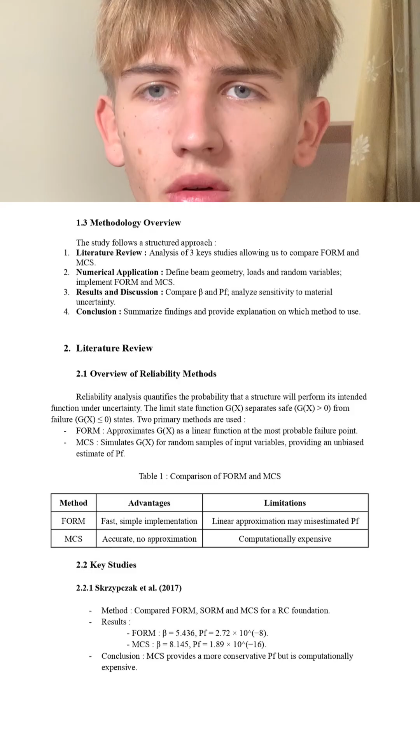So about the literature that I studied for this report, first we had the Skrzypczak document where they compared FORM, SORM, and MCS methods for reinforced concrete foundation. So here are the results obtained. We can see that the MCS provides a more conservative Pf, but is computationally expensive. This means the calculation will take time with this method.

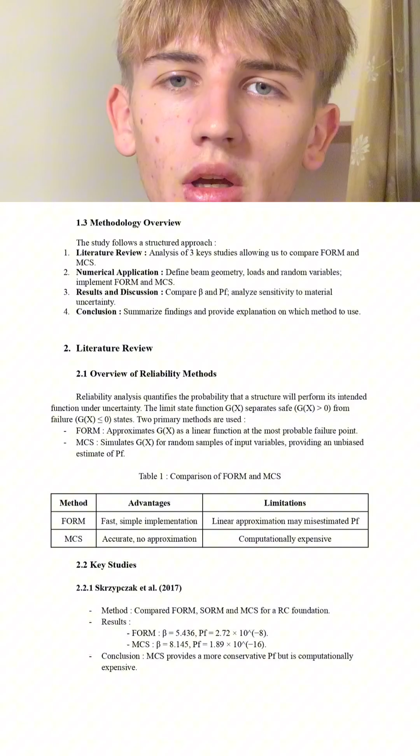About the second document, the Nguyen one, this document applied MCS to a composite steel reinforced concrete beam. So here are the results, and for the conclusion, we can say that the MCS method is essential for capturing uncertainties in composite structures.

And the last document, the El Ghoulbzouri one, compared FORM and ISM. ISM is a developed MCS method, like a new one, for a four-floor reinforced concrete building. So we can see with the results that FORM tends to overestimate the Pf, but is 180 times faster than the ISM method.

So to compare this analysis, we can say that the studies show that the discrepancy between FORM and MCS depends on the nonlinearity of the limit state function G(x). For example, for linear problems like beam bending, the FORM method may underestimate Pf, but for nonlinear problems like foundation stability, the FORM method may overestimate Pf. So this context sets the stage for our study on reinforced concrete beam.

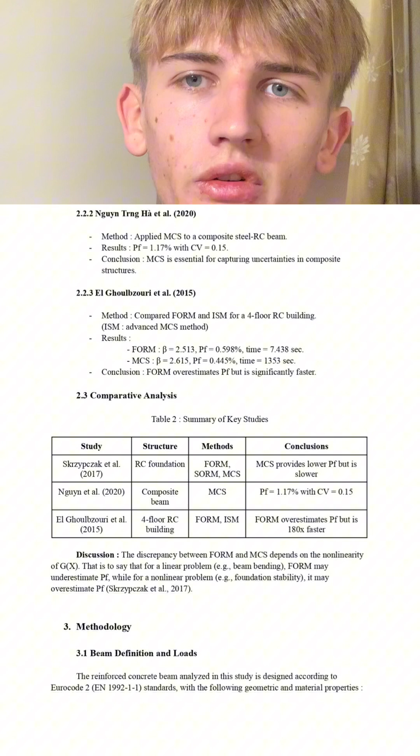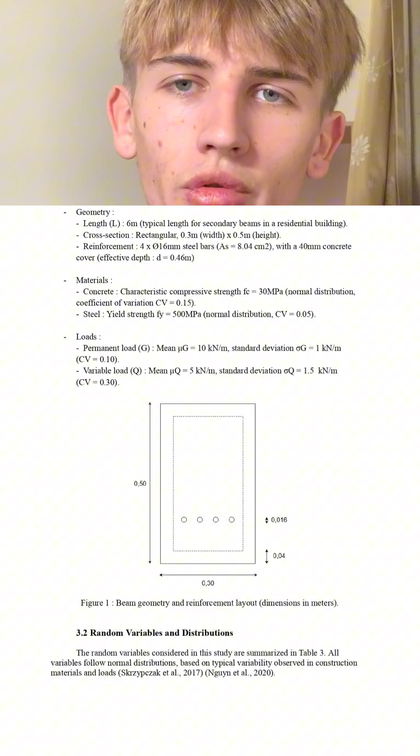So about the methodology now, our study focuses on a reinforced concrete beam designed according to Eurocode 2 with the following properties. So first, the geometry and the materials, as you can see, 6 meters for the length, a cross section 0.3 times 0.5, for the reinforcements, 4 steel bars, and 40 millimeters concrete cover.

About the materials, we took regular concrete and regular steel values. And about the random loads, same. I took the regular values that we can find in Eurocode or something like this.

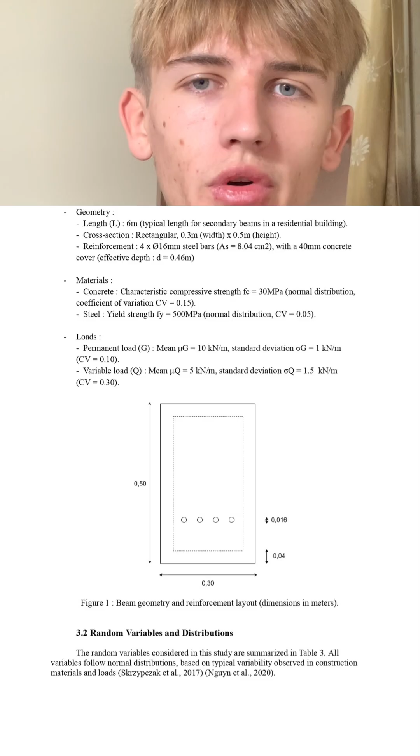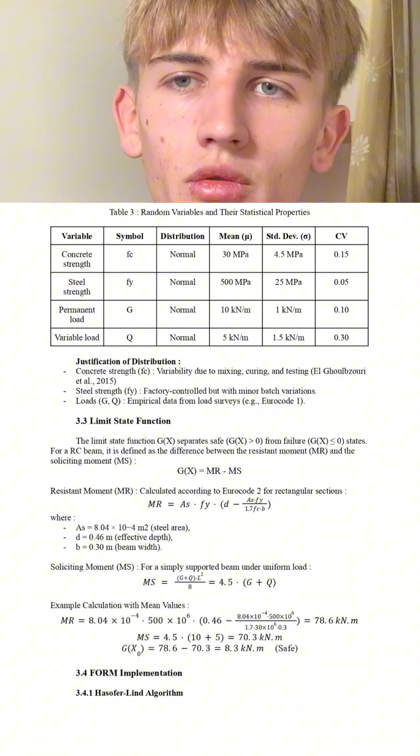So about the limit state function now, we define G(x) equal to Mr minus Ms, where Mr is the resistant moment that we can find in the Eurocode 2, and Ms the soliciting moment. I write the formula just here. So with the values we introduced previously, we obtained for G(x0) 8.3 kilonewton meter. So we can say that it's safe for this example.

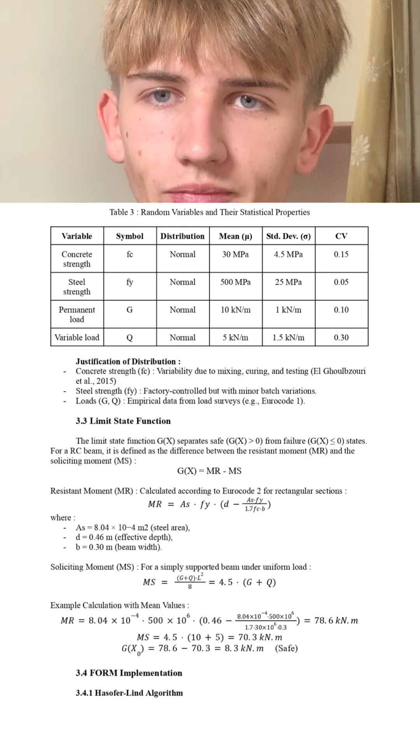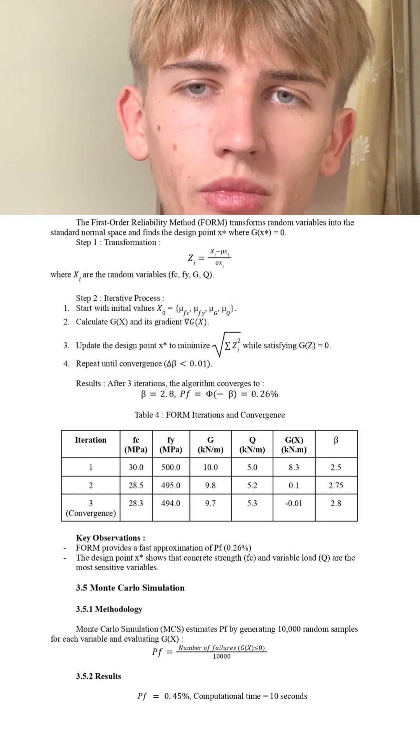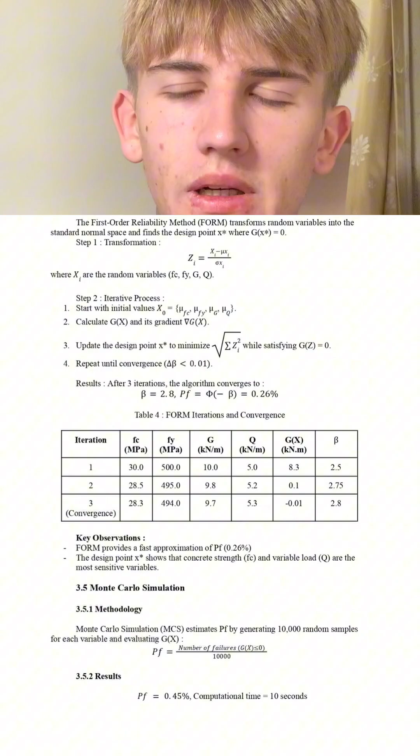And for the methods used, FORM, the first order reliability method, we used the Hasofer-Lind algorithm for a fast linear approximation. However, for Monte Carlo, we used 10,000 simulations for Pf estimation as precise as we can. And then we can dive into the results after using these two methods.

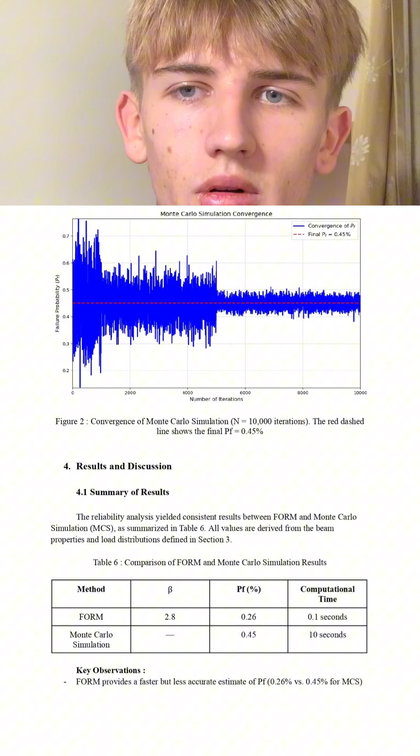So here are the key results of our study. So the comparison of FORM and Monte Carlo in table 6. We can say that FORM underestimates Pf by 42% compared to the Monte Carlo method, which is really precise compared to the FORM one. So this precision has a cost, because Monte Carlo is 100 times slower than FORM.

And the reliability index beta with the FORM method is equal to 2.8, which aligns with the initial safe state, where G(x0) is equal to 8.3 kilonewton meter.

So then for the sensitivity analysis in table 8, my interpretation after the change in the sensitivity values is that higher concrete strength variability, so CV Fc, significantly increased the probability of failure, Pf, and the 42% underestimation by FORM is consistent with literature for linear, mildly nonlinear problems.

So now for the comparison with literature, with the three topics I studied for this report in table 7, our findings confirm that FORM underestimates Pf for linear problems, while it may overestimate Pf for non-linear problems.

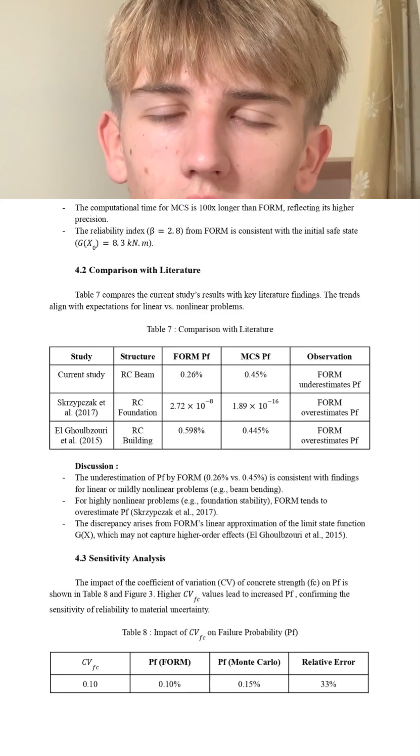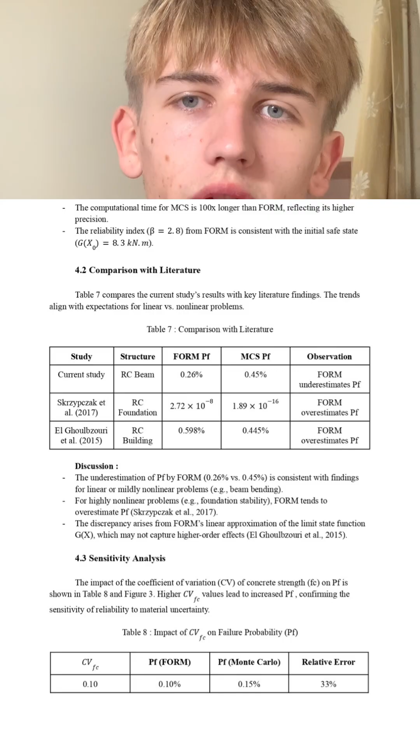Now, for the discussion part, we can ask ourselves, why does FORM underestimate Pf? FORM uses a linear approximation of the limit state function G(x), which misses higher order effects. This aligns with literature, because for linear problems like our beam, the FORM method underestimates Pf, like in the El Ghoulbzouri report. And for nonlinear problems, like the foundation problem, FORM may overestimate Pf, like in the Skrzypczak topic.

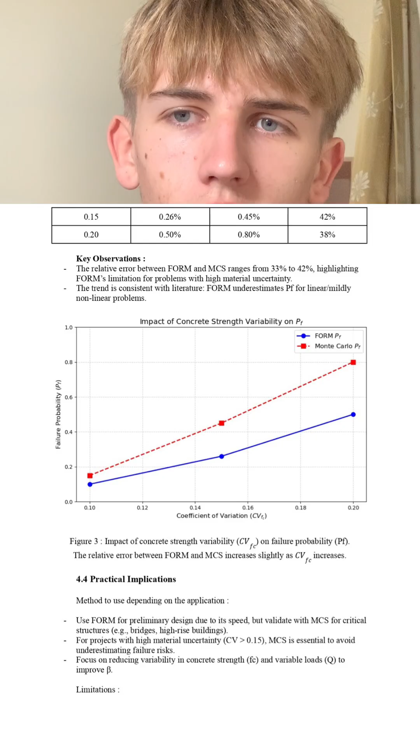So for the practical implication for engineers, we can say that we have to use FORM for preliminary design. It's fast and conservative. We also have to always validate with Monte Carlo for critical structures like bridges and high-rise buildings. And third point, we have to focus on reducing material uncertainty to improve reliability indices beta.

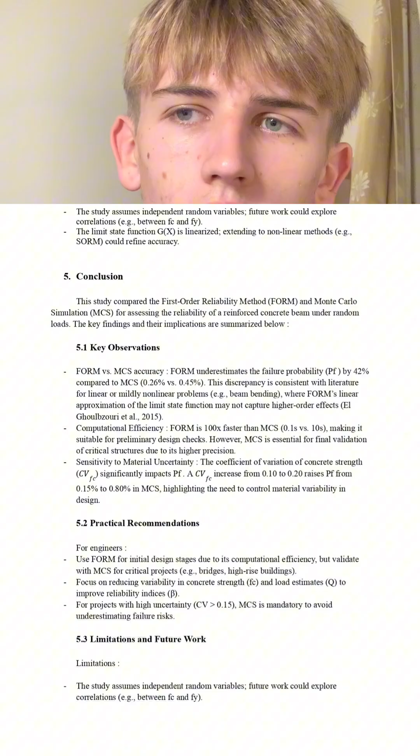Then there are limitations and some questions on future work about this report. So our study assumes independent random variables, which means in future work we could explore correlation, for example, between Fc and Fy. Also, extending the analysis to other structural elements like slabs and columns will provide a comprehensive risk assessment. And finally, trying a hybrid method, like using FORM with Monte Carlo simulation refinement, we could balance speed and accuracy.

So I think we finished talking about this report. The conclusion tries to summarize all the results we obtained before.